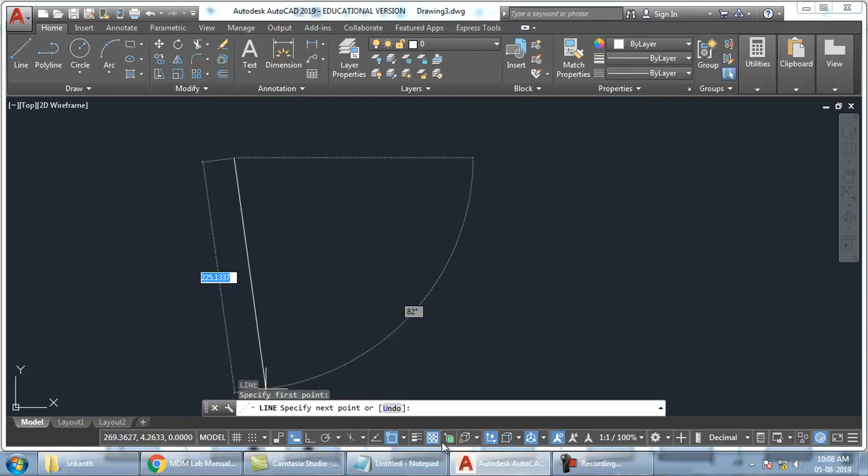So first I have to take what? Diameter D. First I have to take diameter D. So I'll just take a vertical line first. Okay, ortho I'll keep it on. I'll take some amount of line. Then offset. Now diameter, I'll take diameter as 10 mm. Later I will be able to modify it to whatever I want. So 10 mm is diameter.

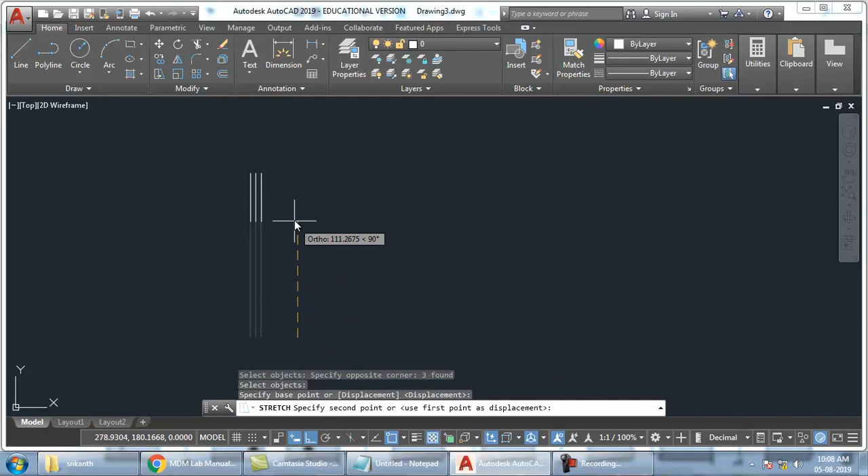So from center, how much offset on both sides? 5. So offset, what is the shortcut? O enter, 5 enter. Then click on both the sides. Click one side, click, and on the other side. Fine. So it has become very, very big. So I'll just shorten this. Ready?

So now we have to draw the top head. So I'll just take a line and keep it here. Fine. Now we need this top dome. How to create this top dome? Diameter is given. What is the diameter? 1.6 D. What is our D? 10. 1.6 into D? 16. So diameter 16 I have to take. So take a circle, click somewhere.

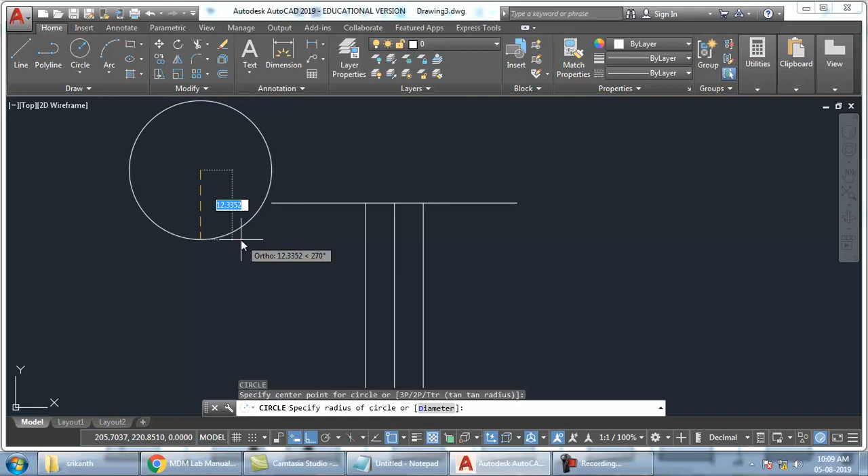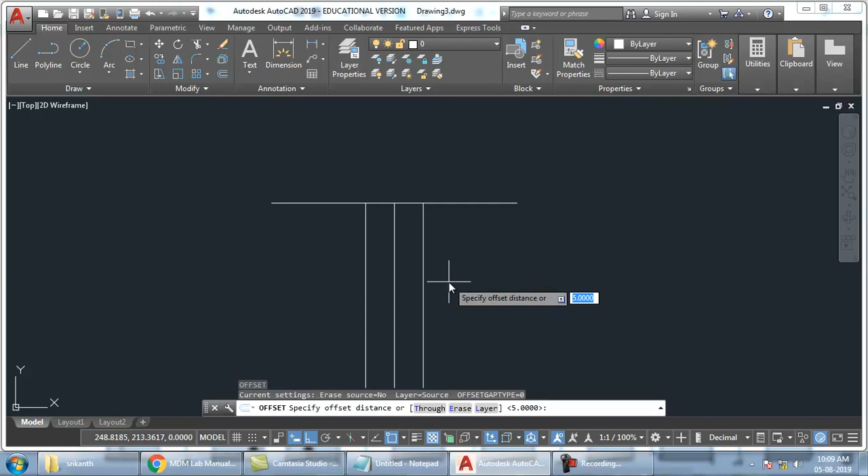Okay, or else let's calculate the center also. Where is the center of this? 0.7 D. That means 0.1 D below. So what is 0.1 D? 0.1 into 10. How much? 1 mm. So I'll take 1 mm offset. Offset 1 mm from the top below. So this point is the center for me.

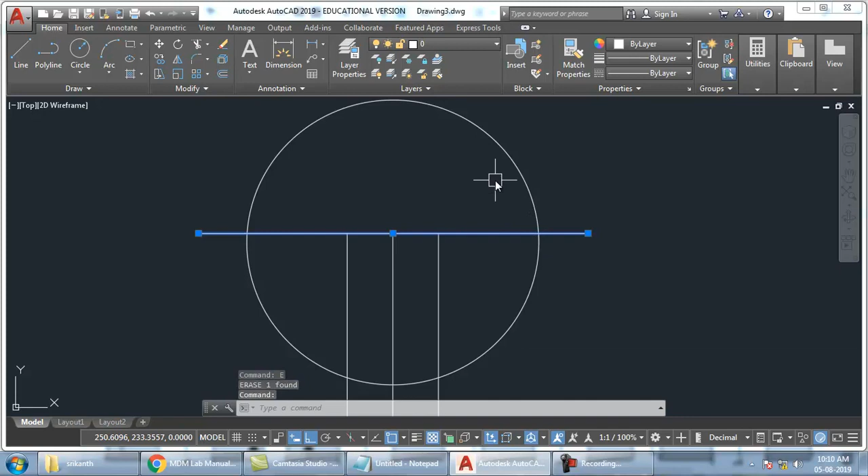So take circle, center, and what is the diameter? 1.6 into D. That gives us 16. So 16. Got it? Now this is the top face of the plate. This is just for center. So once you draw the circle, just delete this. We don't need this. And up to this line, I have to trim it. So trim, TR, double enter, trim all this. So my head is ready. The head is ready. Fine.

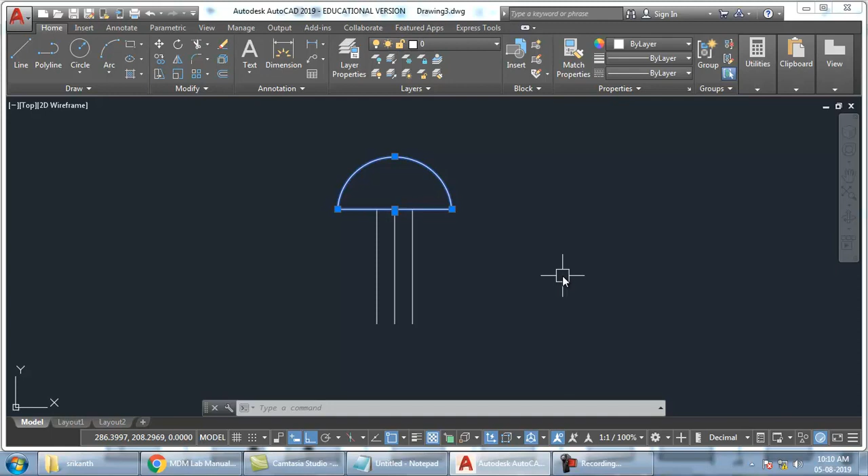Okay. So this much will be enough for me. So now what I'll do, I'll create a block from this. What is the block command? Note down. B enter. B enter is the command for block. So I'll type B enter.

Now this is the block dialog box. In this I have to give the name of this block. So what is the name of this? This is a snap head. So I'll type snap head here. Ready? Next there are some options here. First option is base point. So you have to click on this pick point and click here.

And then you have to select objects. So select object and select this top. Don't select the bottom lines. We don't need them. We need only the top part. That's it. So after selecting, press enter. Now I've done both these options. I have picked a point as base point and I have selected the object.

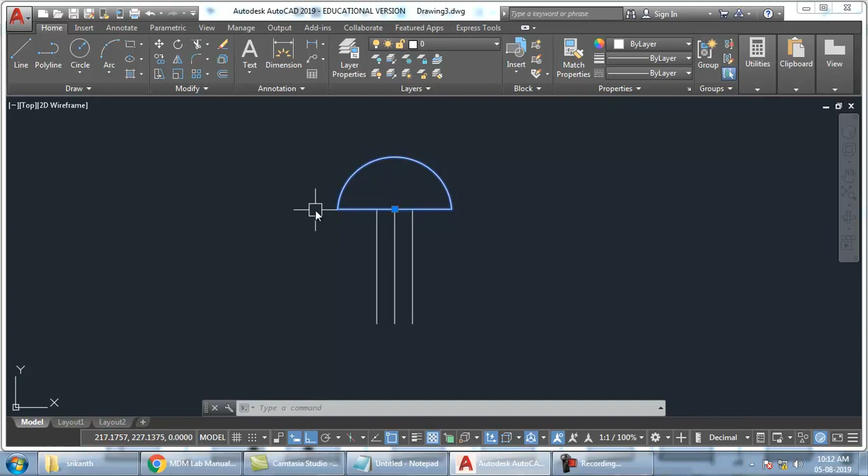So click OK. So now you can see if I select this, all of it is getting selected at same time. So now it is a block. So now what I can do is I can go for insert command. Insert command, take down the shortcut, I enter.

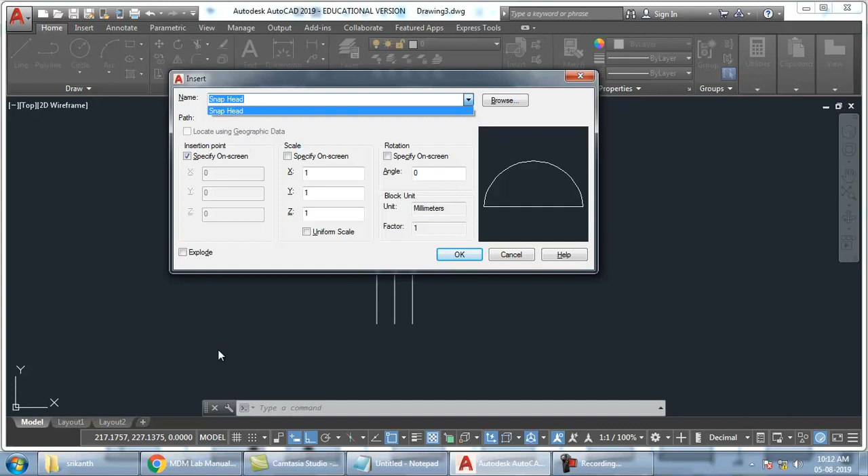I enter. So when I do I enter, I'll get a list of all the blocks that I have created here. So choose whatever block you want to insert, click OK. It's coming. So I had picked a base point. So I'm moving it from the base point, and wherever I want, I can keep it.

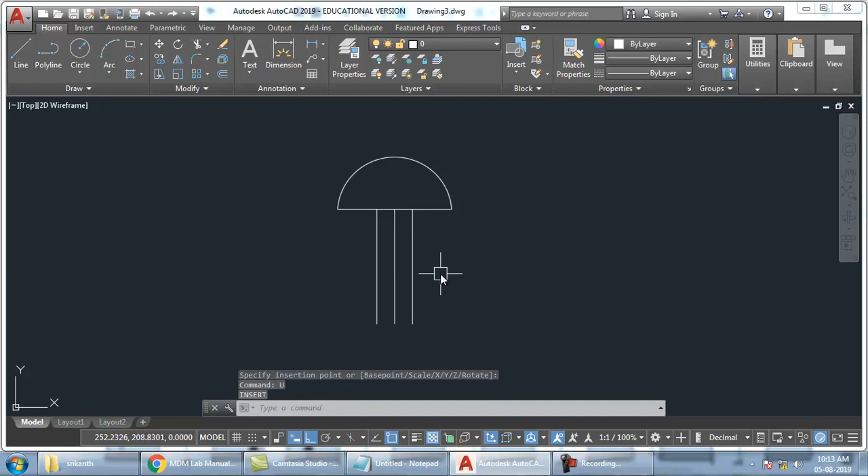Getting it? So suppose I want it reverse. So again insert. I'll take this and I want to rotate it also. If you want, you can also provide scaling. So click OK. Now I want to keep it at the bottom side and I am able to rotate it. So is it rotating? Yes. So when I am rotating, I want it to be horizontal like this.

Easy. So you don't have to draw it again and again every time. You just have to draw it once, and that same thing you can reuse again and again, saving a lot of time. So similarly, you have to create all the rivet heads, and make them into blocks. Once the block is ready, you can always go to the insert command, choose whatever head you want, and place it wherever you want. So this much is understood. Wherever you are having doubts, you can just ask me, I'll explain it.

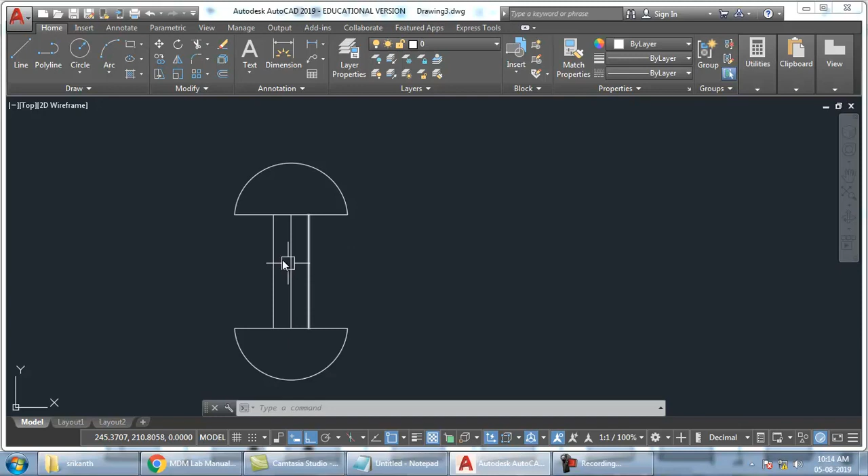Now next part, I will draw and show you the single riveted lap joint. For the others, you can accordingly do it. You are smart enough. P value, PR value, everything I have given the formula, and diagrams are also available. I've also given you the blog from where you can download the manual. Right? So, yeah.

So here, this is the question. Draw sectional front view and broken top view of single riveted lap joint for sheets of thickness 16 mm. So T value has been given to us. Nothing else will be given. Use snap head type of rivet here. So for snap head, I have already created the block. I am ready to start the drawing.

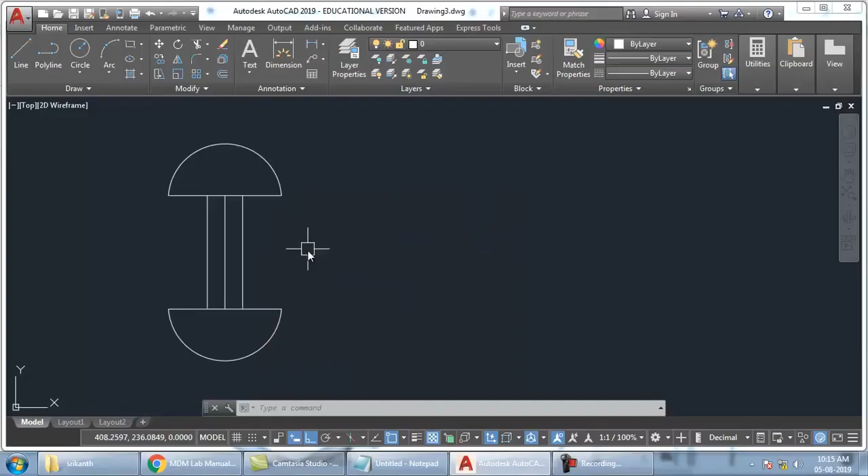So plate thickness is given as 16 mm. I'll just delete this. Once you create a block, you can delete the actual object also. The block will be there in insert. So now I'll start with a plate. I'll just take some random thickness. Which command should I take? Offset, O enter, 16 enter, then click on the plate above, and also click once again below.

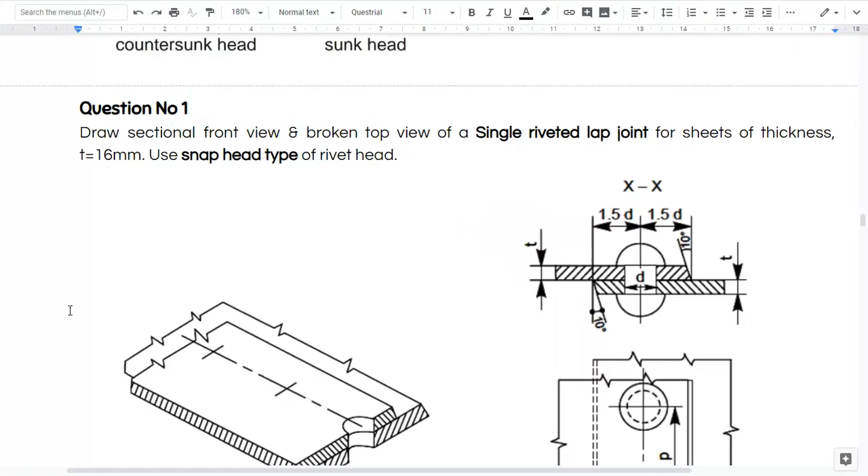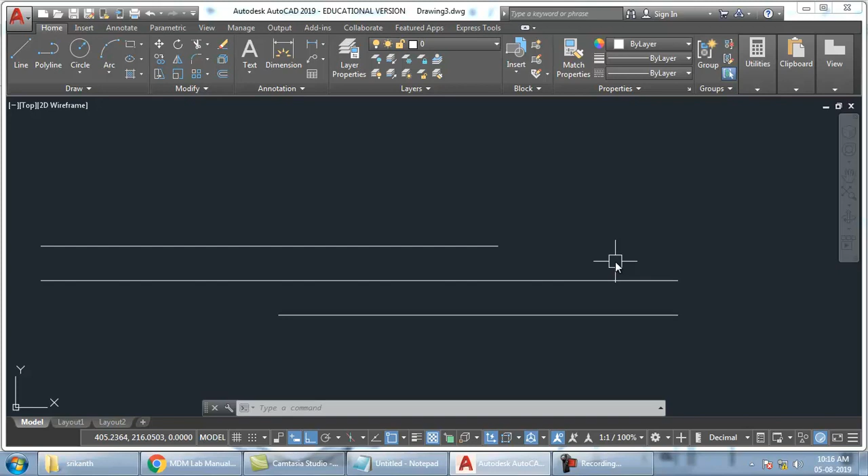So now the bottom plate is on the right side, so I'll extend it on the right side. Top plate, I'll extend it on this side. You can just select the line and drag this. Or the command which I used just now is stretch. Yes, enter. It's a slightly more complicated command. I'm not telling you the details. Those who are very good at it can use it, others can just go for selection and dragging the point.

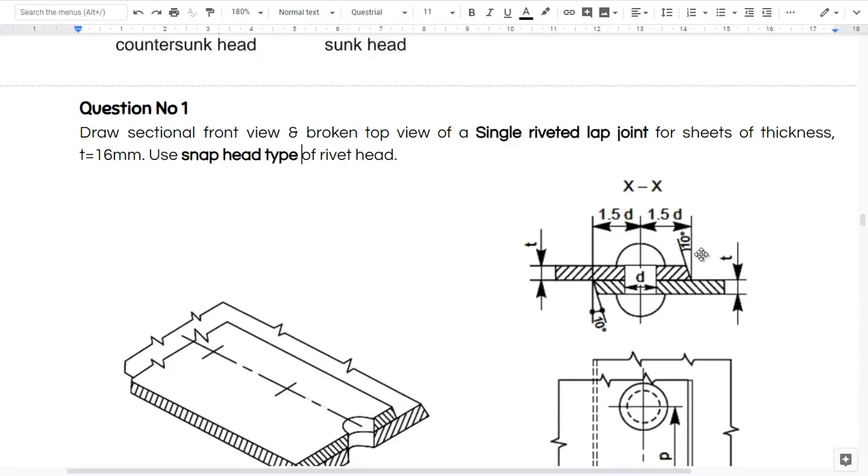So now, what can you see here? What is the angle? 10 degrees is the angle. So I'll just take a straight line here first, and then from here I need 10 degrees. To get 10 degrees, go to polar. First you have to turn it on. Now it is on. Now it is off.

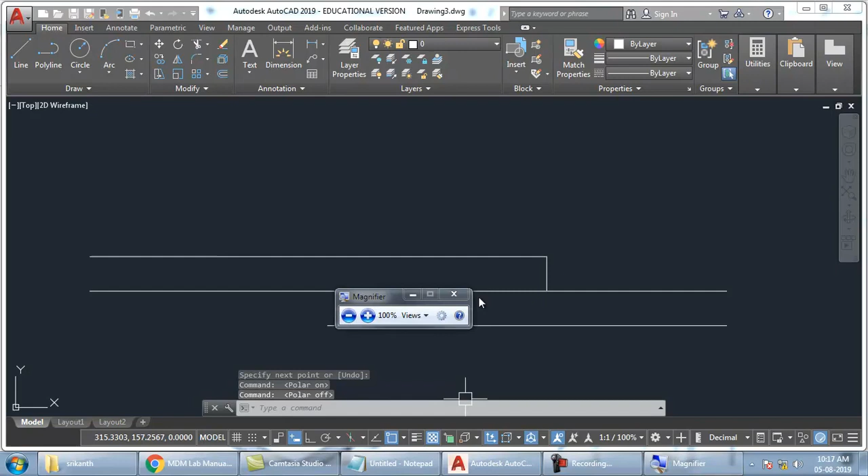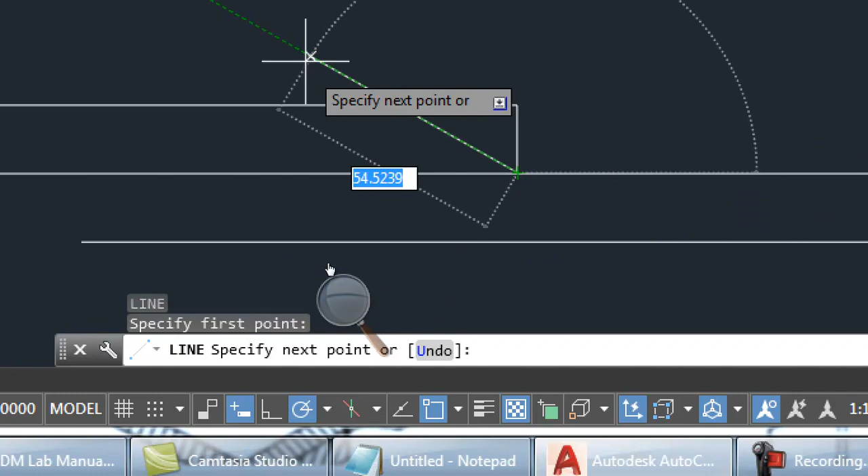Can you see the backside, everyone? Or do you want to magnify? So here, this is polar. Polar setting on, polar setting off. First you have to turn it on. Then in the settings, choose 10 degrees. Now I can create the 10 degree line. So take line command. This is 90. From 90 I want 10 degrees this side.

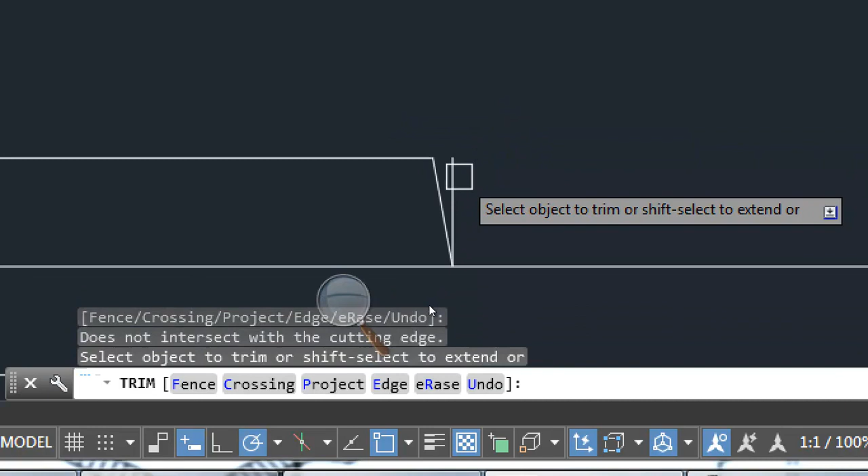Okay. This side. Fine. So from 90 just move 90 plus 10, 100. So it is showing 100. Now trim it. TR double enter, trim it. So this line is not going. What to do? Select and delete. Okay. Or else, okay, let us keep it for a while because we need some distance now.

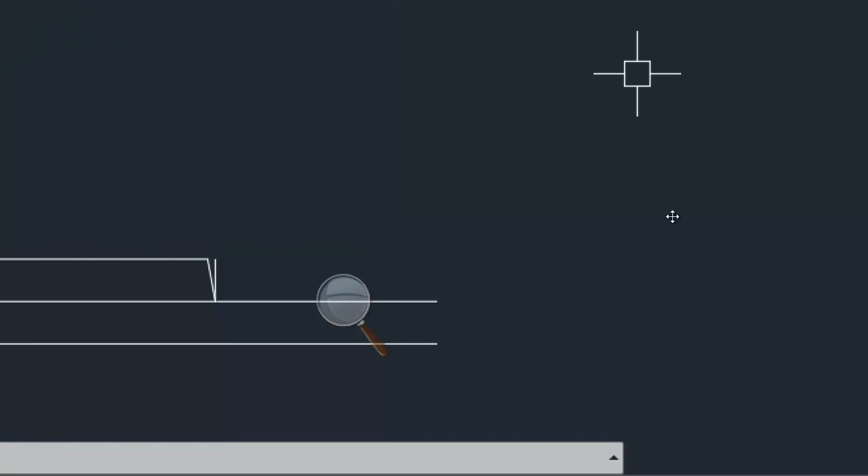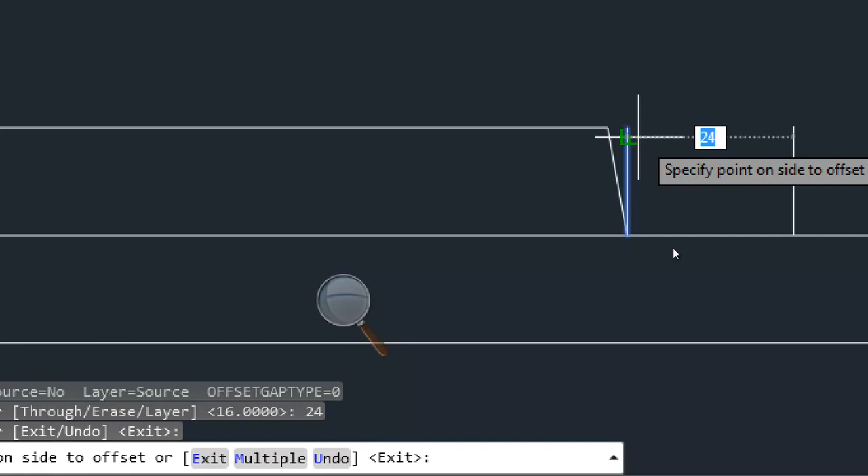So what is the distance required here? 1.5 D. What is our D? D value 16. Our D value is 16, right? So take 16. 16 into 1.5? 24. So take offset again, 24. So which line should we offset? This line or this line? Vertical line we have to offset. Don't offset this line. So vertical line, click on this, left side. Wow. So less.

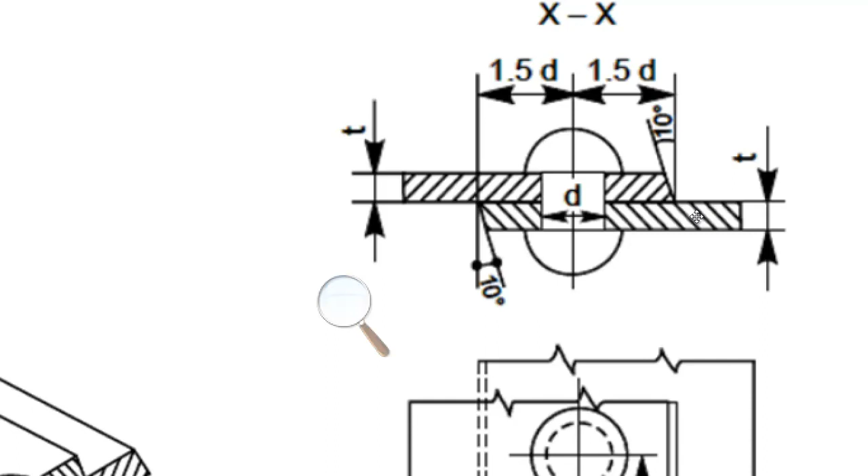What is the D? Diameter? T value is 16. 6 4 is 24. So D value is 24. You didn't calculate D value. T value is given as 16. So 6 into root T you have to do. 6 into root T is 24. So D value is 24. So 1.5 into D, 36. Calculator. How much? 36. So offset 36 from here, 36. Came on? Then you can just extend it down.

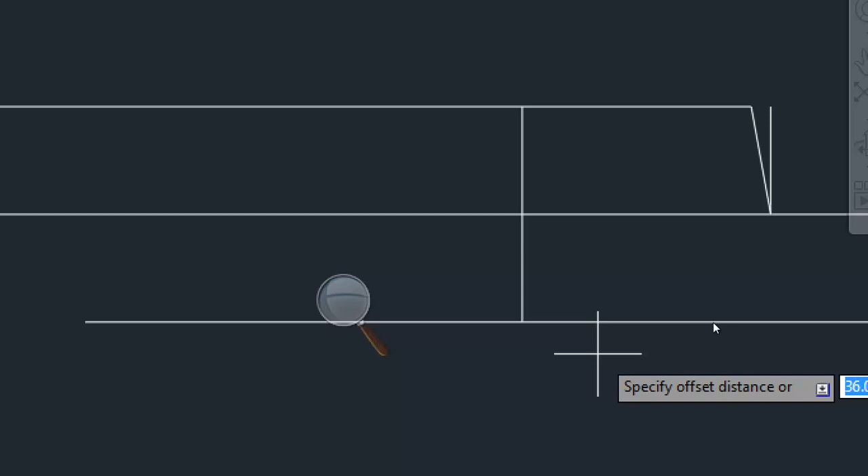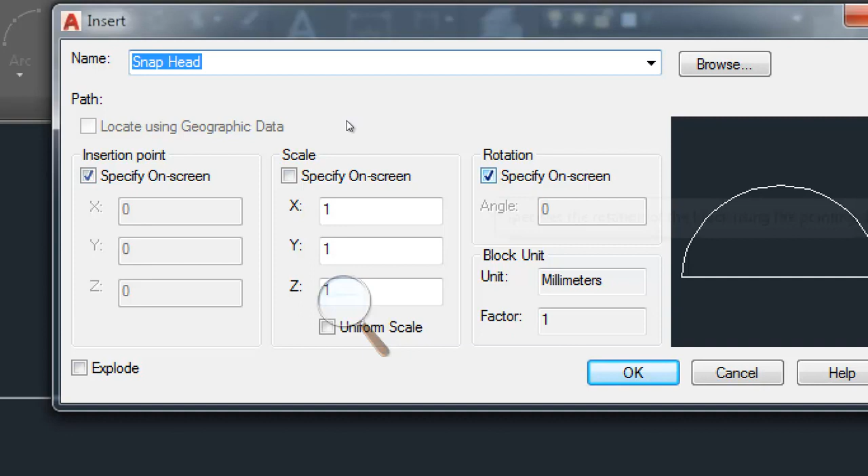Now create D. What is D? Diameter 24. Half on each side. Offset how much? 12 on each side. So 12 this side, 12 this side. Done. Next what to do? Insert. I enter. So which block do we want? Snap head. So I want to insert and rotate. So then I want to place it here, and rotation is horizontal only. One more I want. Again press I enter. Click OK. And place it here. This time I want to rotate it. Done.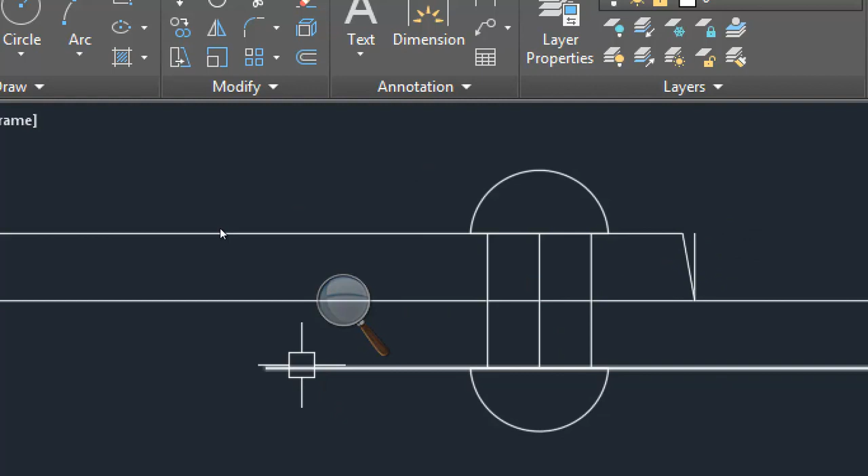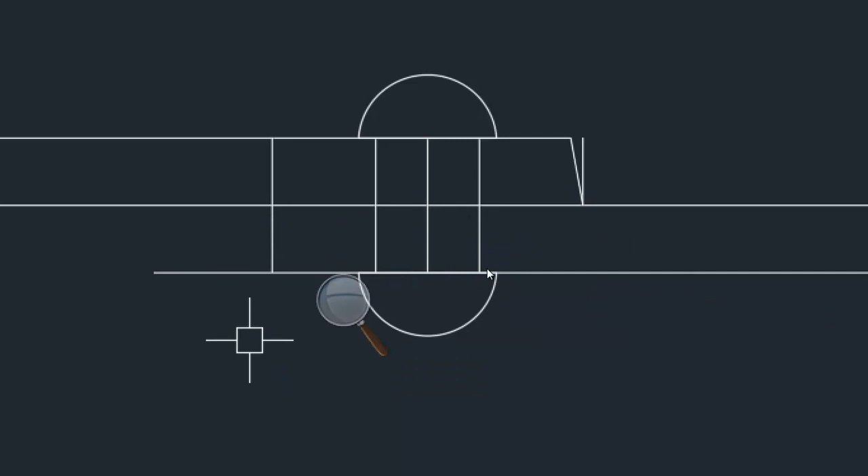Next, the bottom plate. Same thing you have to do for bottom plate. What is the distance of the bottom plate? 1.5 D. So take 1.5 D from the axis. So offset 1.5 is how much? 36 on this side. Done. Once again, I have to take line command. I have to start at the bottom side. And from this angle, I have to take 10 degrees this side. How much is this? 270. 270 plus 10. Click. Remove it.

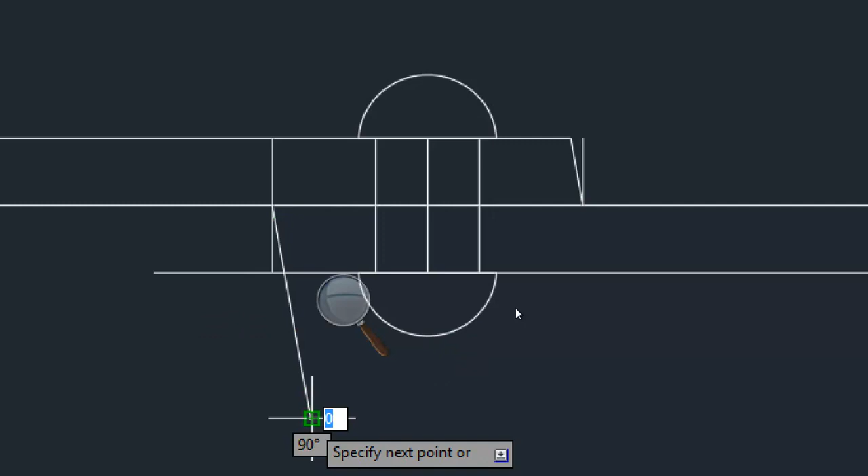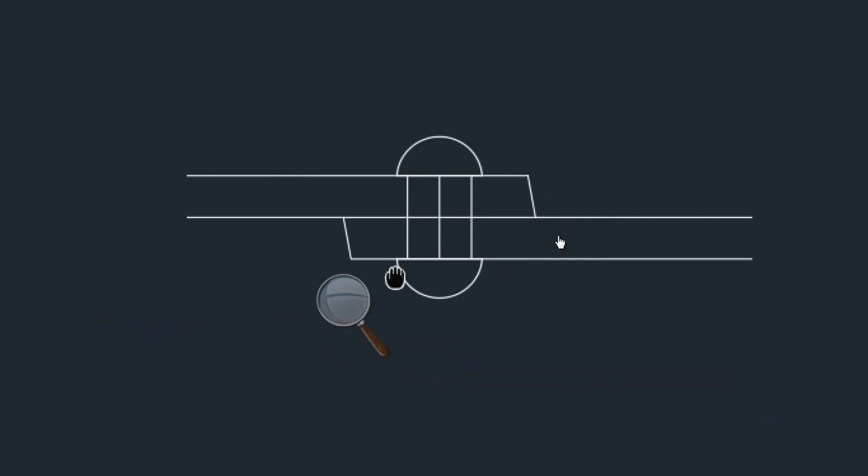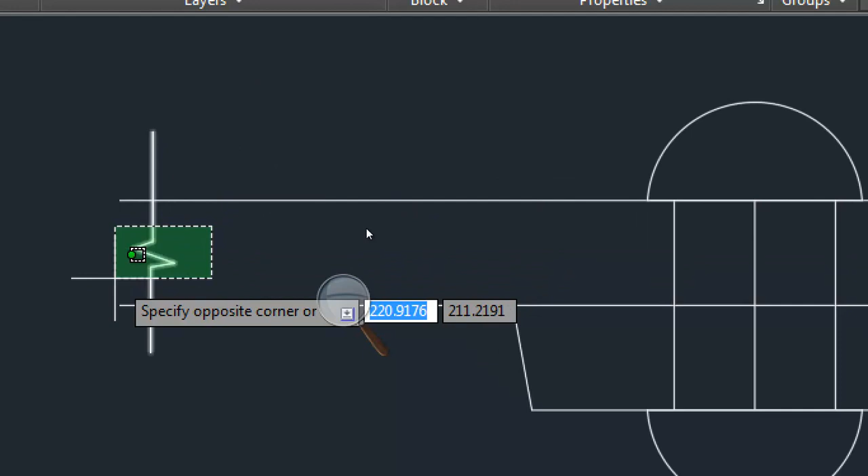Then what to do? Trim. TR, double enter, trim it. This line also we don't need it. This line work is over. Delete everything that is not needed. That's it. Right? So this is our plate. Fine. Now you have to show the broken view here. For broken view, you have to draw this zigzag line. Copy it. Paste. You know the shortcut? Control C, Control V. So copy paste it here. And then extend this line slightly.

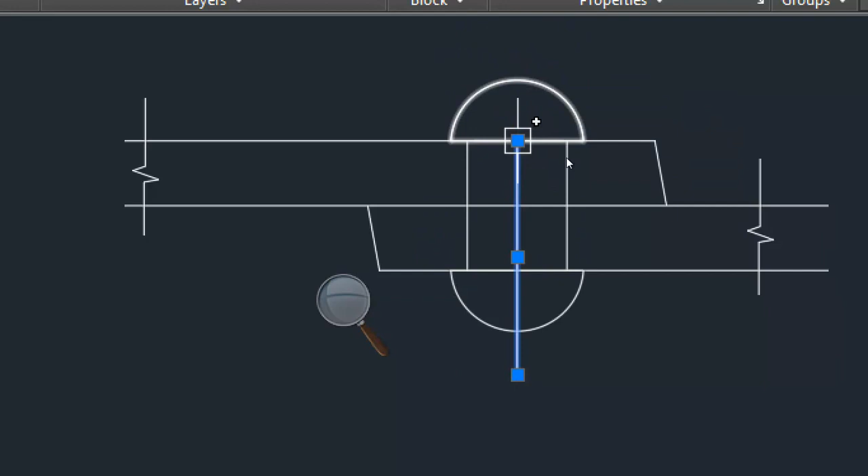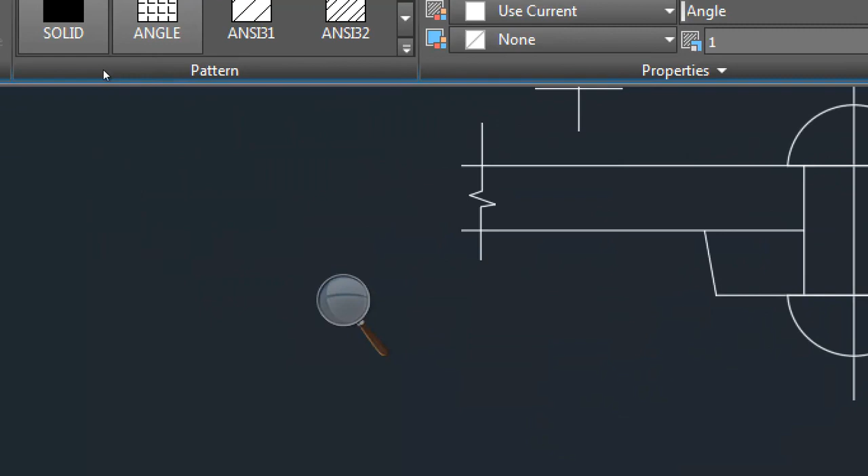Undo. This line is axis line, right? So axis line, we want it slightly more. And this line we have to trim it, because we are showing the section. When you are showing the section, this line will not appear. And finally go for hatch. What is the command for hatch? H, enter. So in hatch, what hatch we have to take? ANSI 31. First create hatch only for the top plate. Press enter. Then create another hatch for the bottom plate. So this side and this side.

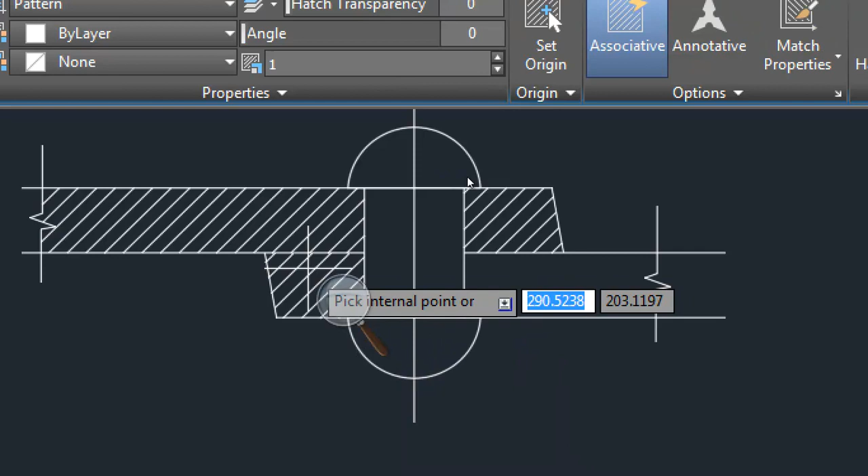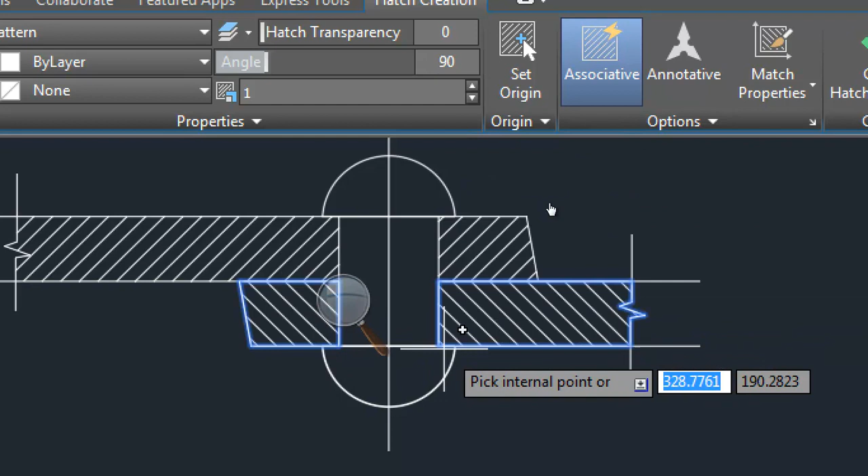But before doing that, angle. What should be the angle here? If you take 45, it will become horizontal or vertical? 90 you have to rotate. Now it's correct. So bottom plate and top plates are different, so you have to be careful. Their hatching should also be different. Clear? So this is the sectional front view. Next, what you have to do?

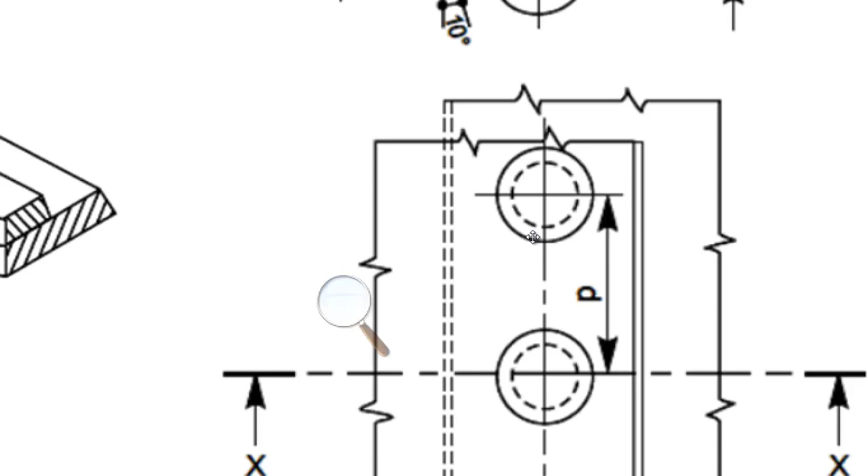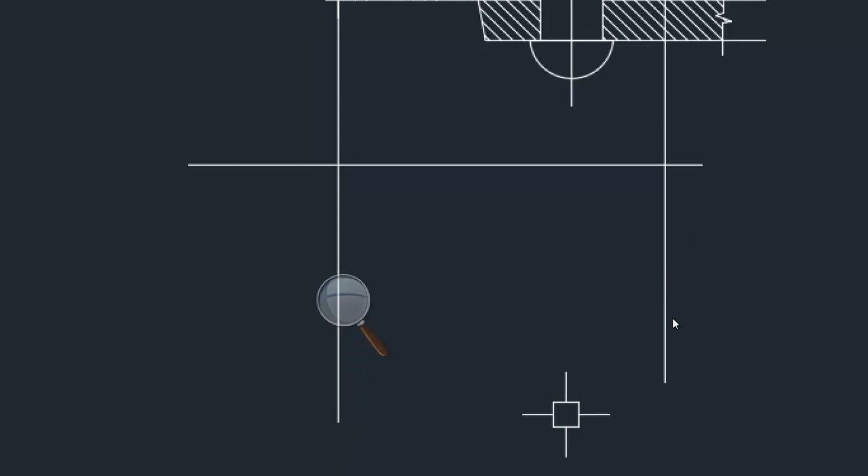Top view. Broken top view. What type of top view? Broken top view. Fine. So for broken top view, start here again. So take a line. Top plate is visible first, right? So take top plate. Top plate starting point, I'll take it here. Then top plate, it's ending somewhere here. Right? And at some convenient distance, I'll start marking the holes.

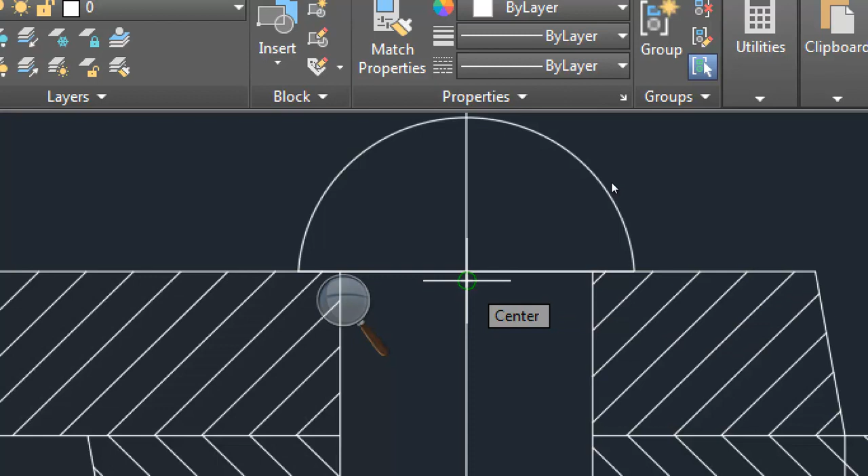Okay? So how is he showing? First he is showing this. So what is this outer and inner diameters? They are visible in the top view, right? So those we have to choose from here. So take a circle. This point as center. Don't take the bottom. This point you should not take as center. Center of the circle should not be taken. Center of this you have to choose. And draw a circle here. And draw one more circle with the same point up to here.

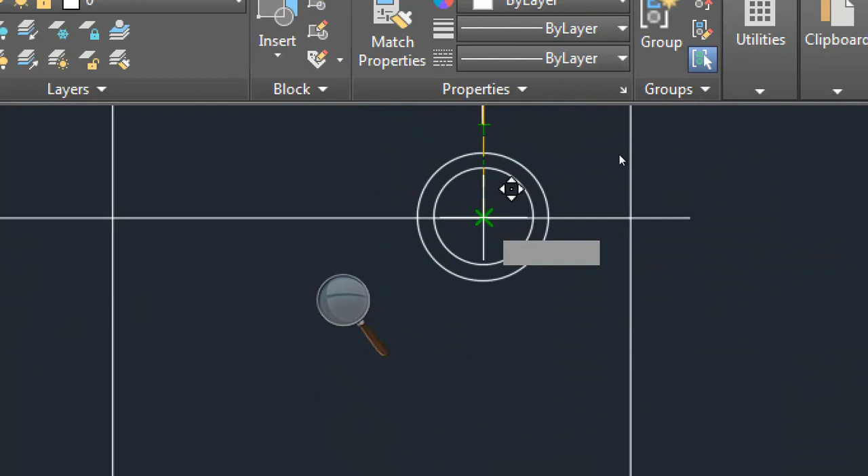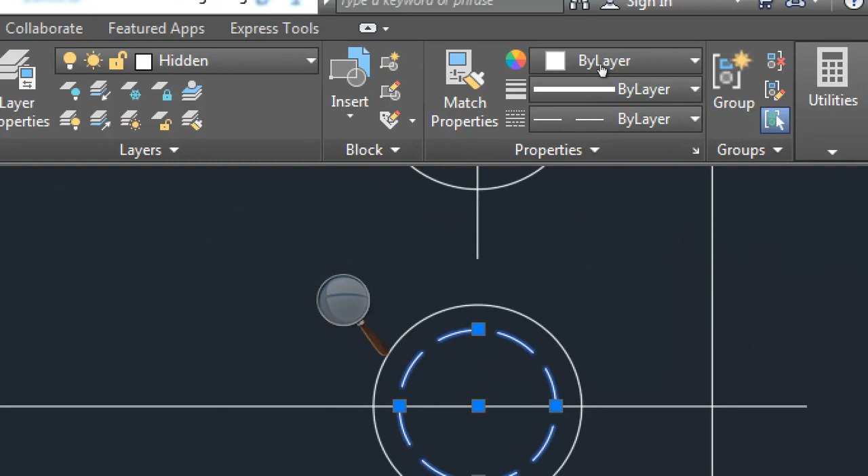Now these two, I will have to move. Where? Where should I move it? Here. Okay. Now this bigger circle is solid because it is visible. Whereas the inner one, is it visible? Not visible. So we have to change it to hidden. That's correct. And what about this line? This line. What is that line? Axis. Okay.

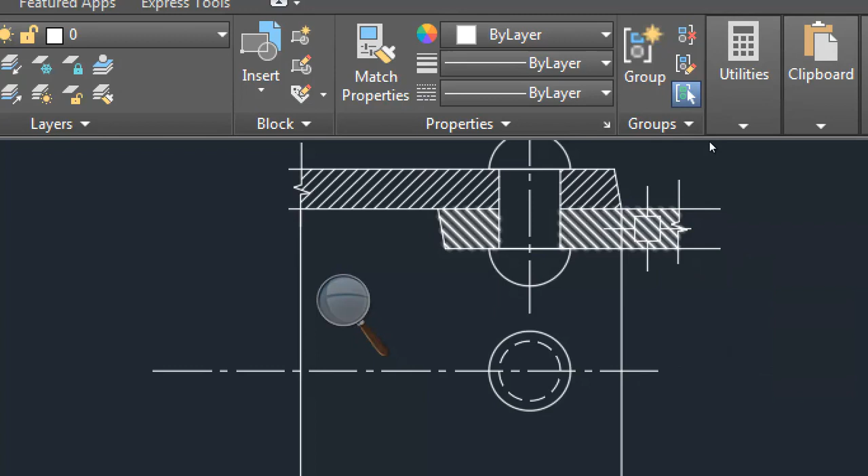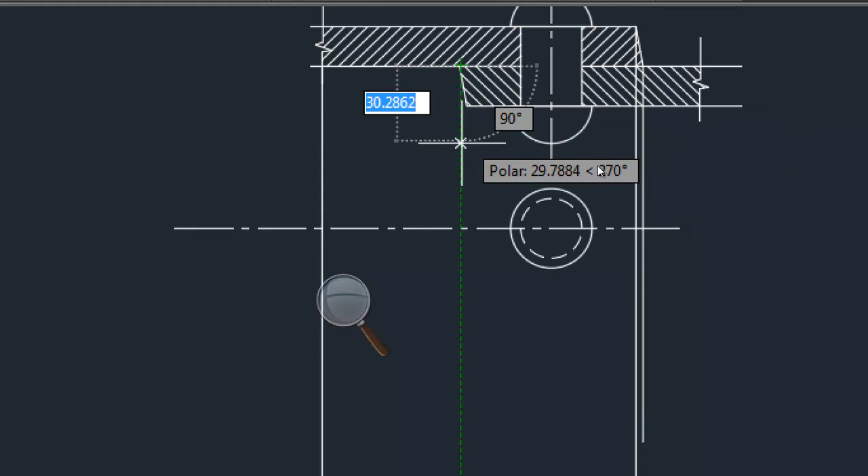Clear? So now from the top, when you see, there are two edges which we can see. Correct? One edge, bottom edge we have drawn. Then top edge also you have to draw. Top edge. Clear? So top plate is done. What about bottom plate? Bottom plate also we have to show. So bottom plate, start from this. Take big line. And this one also we have to show, right?

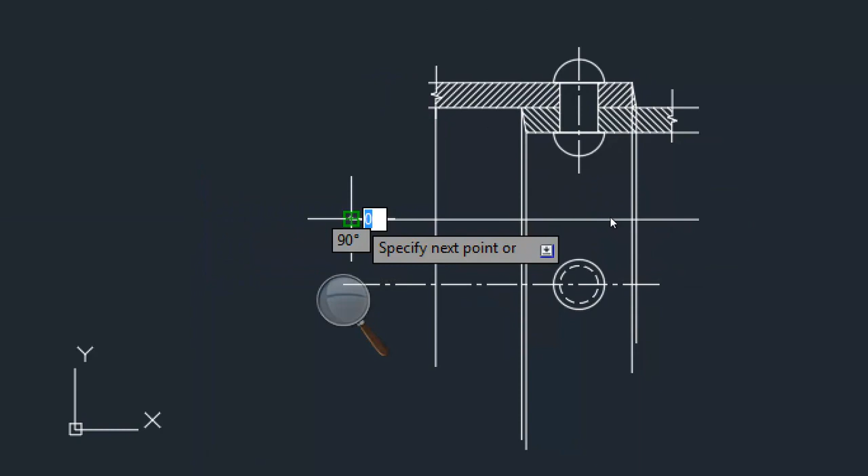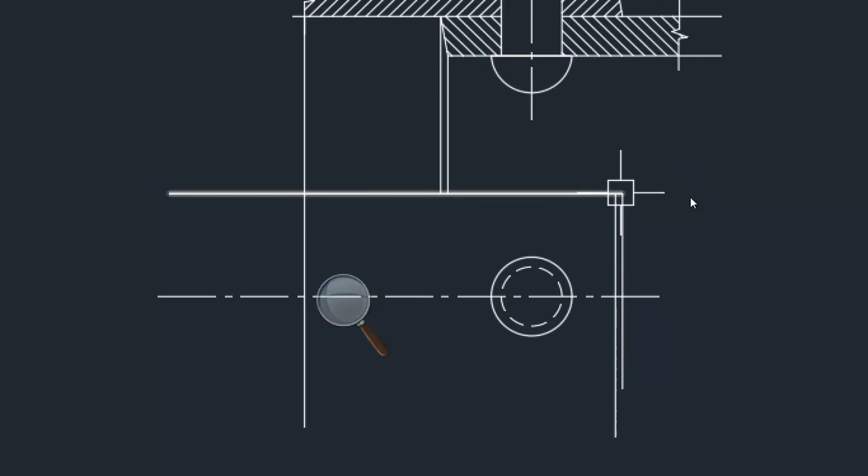Okay. So I'll do one thing. I'll take this slightly below. The starting point I'll take somewhere here. So top plate I'll take starting point here. Then what I have to do? I have to trim this off. So this is the top plate. And here this is the bottom plate.

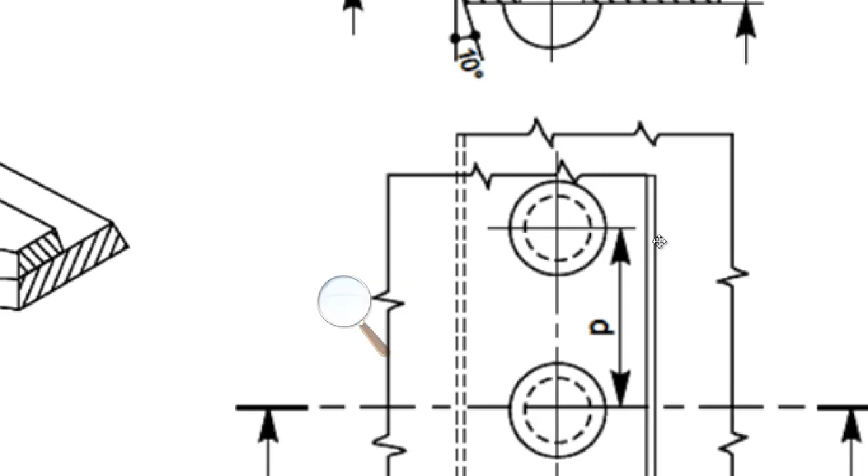So what is the distance? P. What is P? 3 times diameter. What is our diameter? 24 into 3. How much? 72. So take offset. How much? 72. At least 3 rivets you have to show. So then take a vertical line, place it here. And this is also axis. So axis.

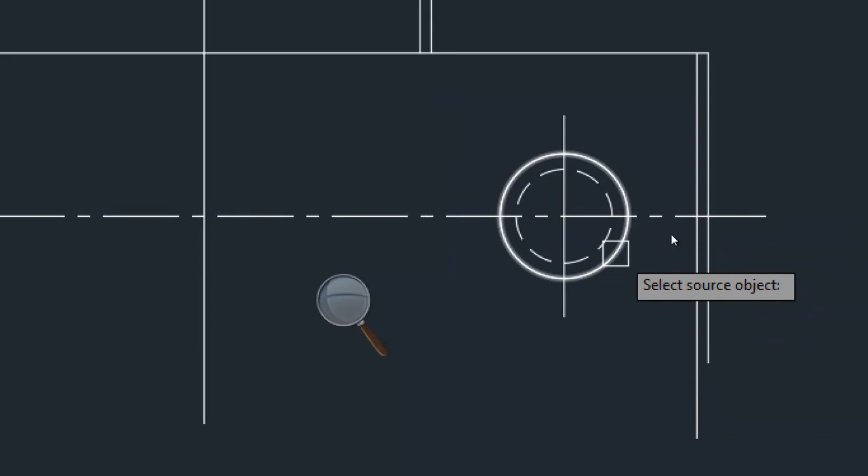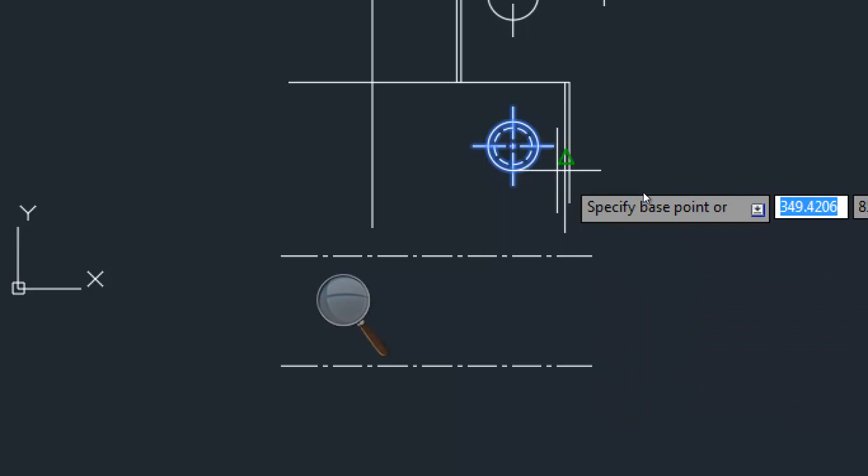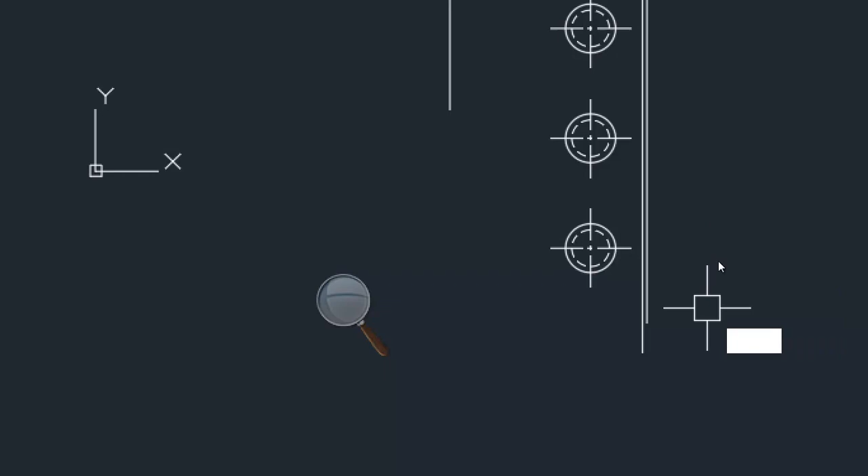Okay. This line I don't want very big. This I'll just remove. So I'll take a copy of this and rotate it. Okay. So now the same I have to copy. How many times? All these points. Done. Remove all this. Extend these lines. And then from here also you need 2 lines. I'm creating them separately. Extend it up to this point. Okay, I'll drag it.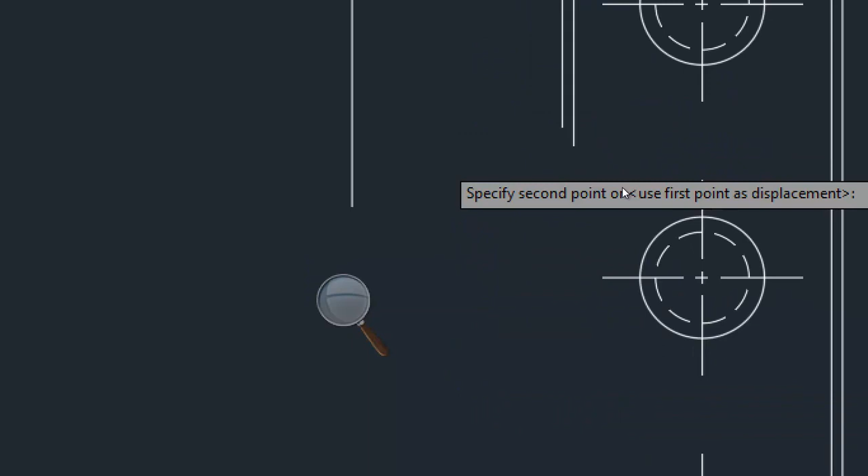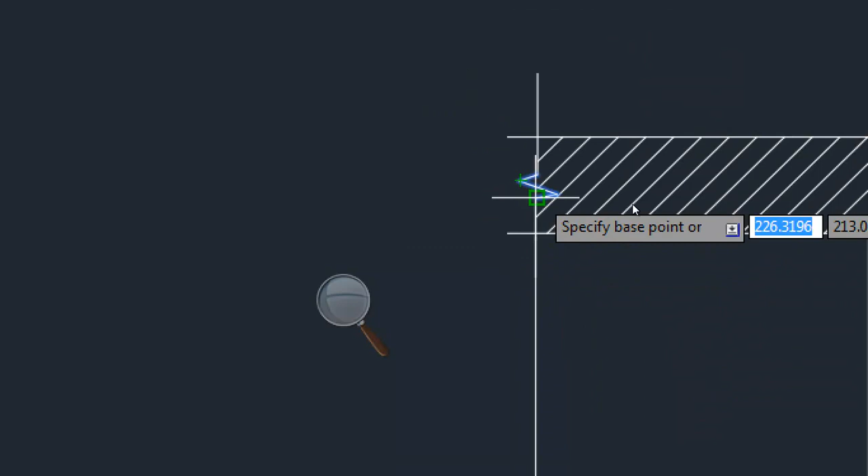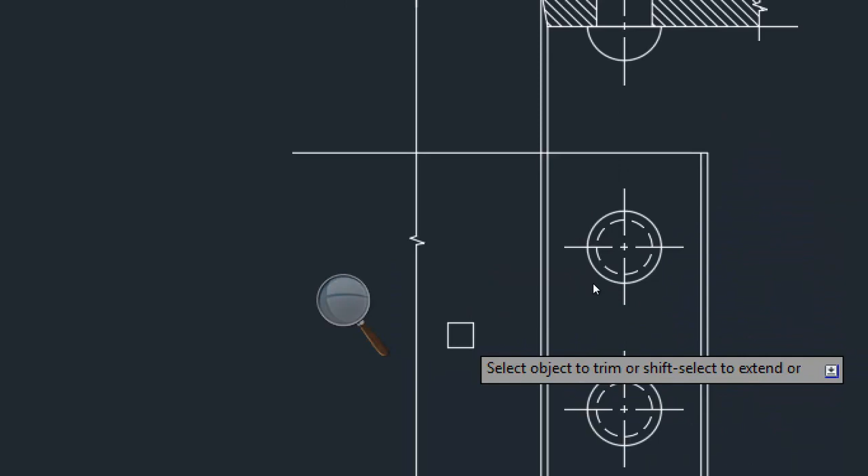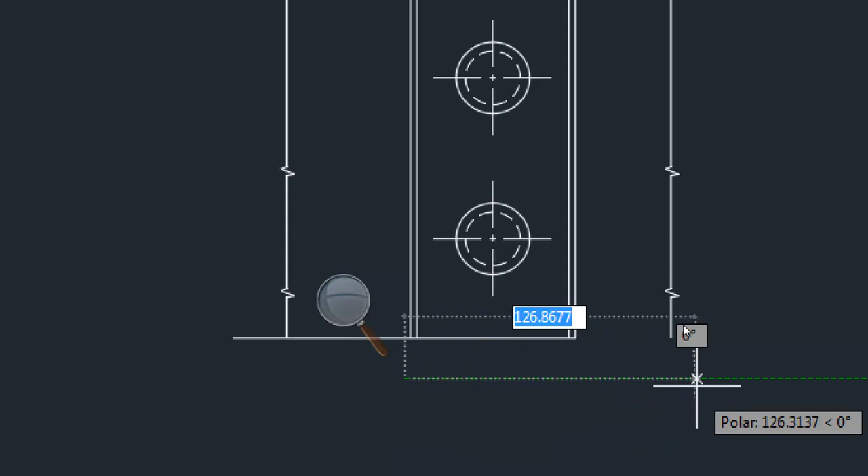Fine. Now I have to show this as broken view. So I'll take this, and I'll be placing it at a number of places, 2 or 3 points. I'll extend this and I'll just trim this off. Easy? Now the plate is broken. Now the bottom plate. Bottom plate I'm showing on this side. So I'll draw this. Wait. Okay. So broken view again I have to show here. Again the bottom plate I'll show till here. So I'll just extend this.

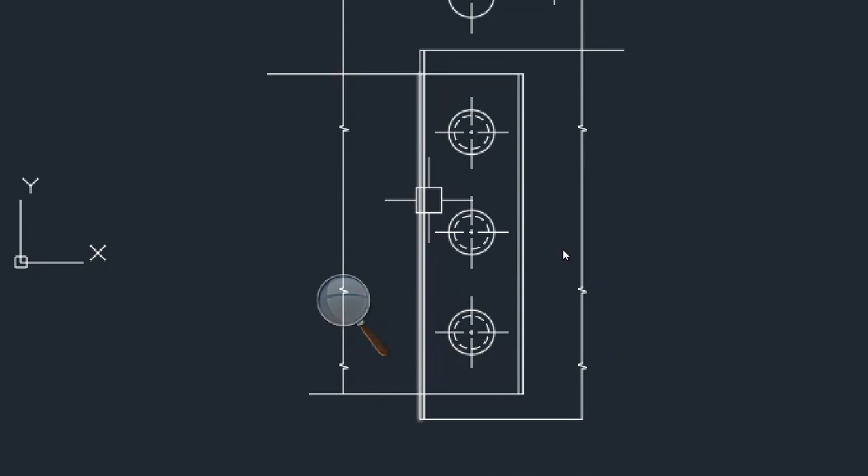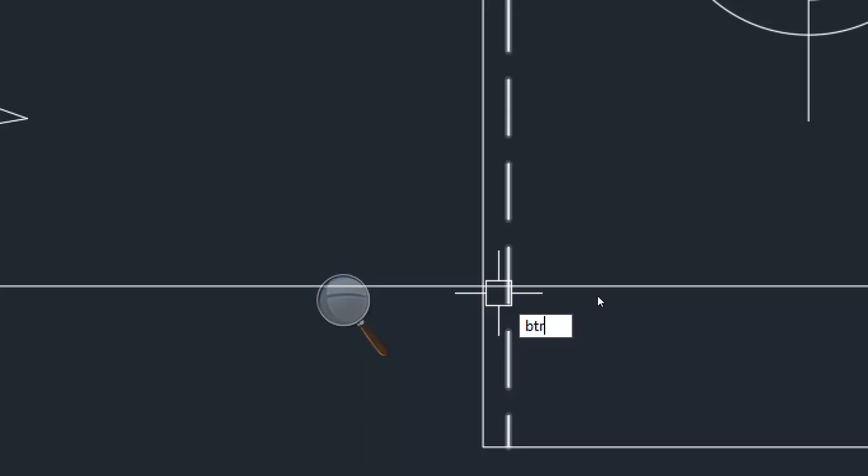Now will these lines be visible? Bottom plate, right? Will these 2 lines be visible? No. So you have to make them hidden. So this hidden I'll apply here. And what about this line? That will also be hidden, but only from this point to this point. So I'll just break it slightly. Hidden. So this line will be visible, because it is coming out of the top plate. And again here also this line will be visible. What about this line? It is hidden.

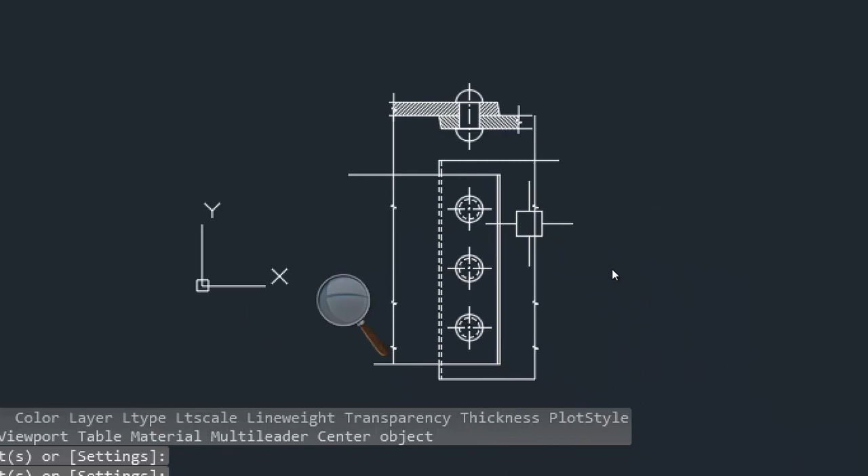Correct? Understood? So this is how you have to draw the sectional front view and the top view. Is it clear? Now there are a number of problems. Minimum 3 to 4 problems you have to solve today itself. Others also you have to practice at home. Okay? Start.